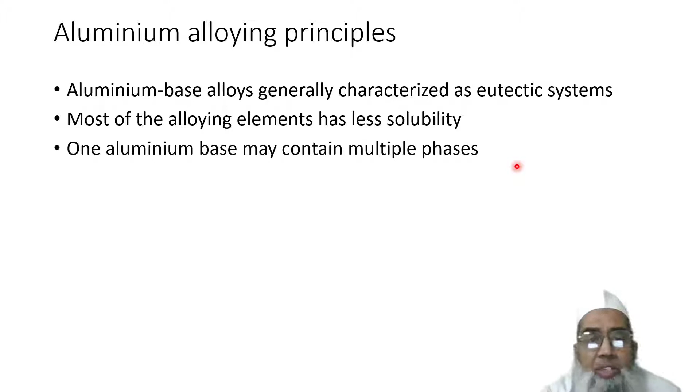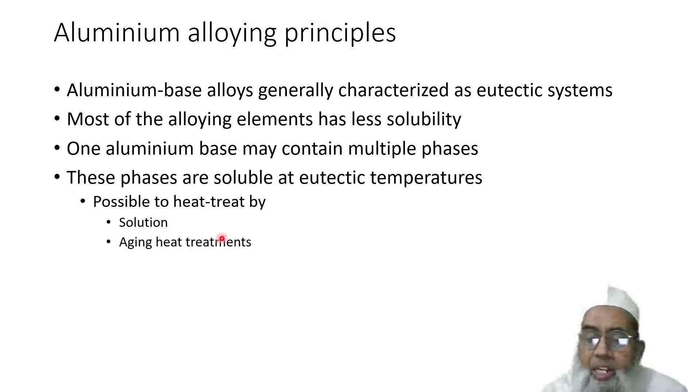One aluminium base can contain multiple phases. These phases are soluble at eutectic temperatures. They can be heat treated by solution heat treatment or through aging heat treatment techniques. The major alloying elements are copper, silicon, magnesium, zinc, chromium, manganese, titanium. However, iron is usually considered an impurity.

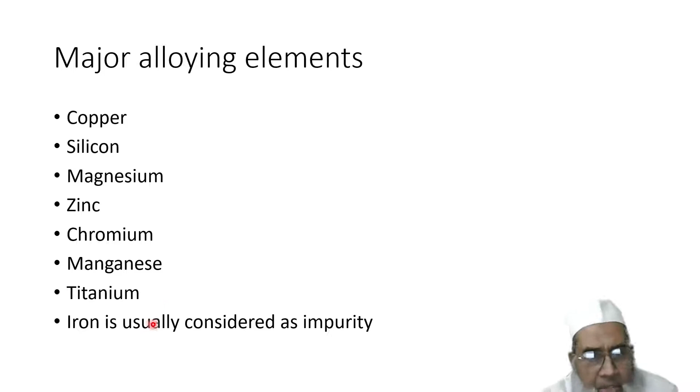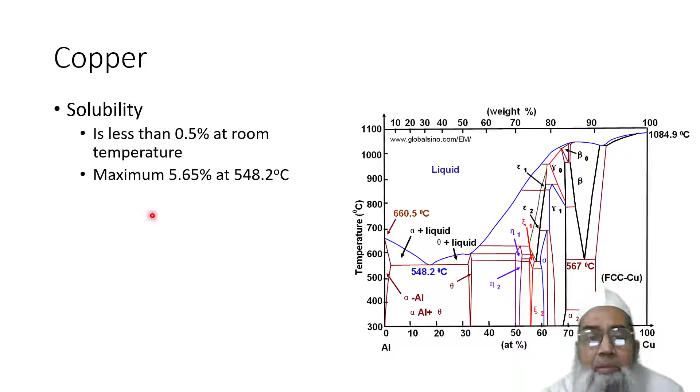First, let us discuss aluminium copper. This is the equilibrium diagram of the aluminium copper system. Here is the eutectic composition, with maximum solubility at 548 degrees centigrade, about 5.65%. It is less than 0.5% at room temperature.

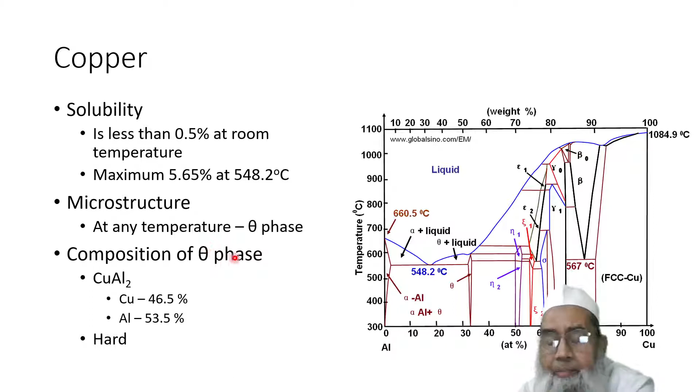The microstructure at any temperature contains theta. The composition of the theta phase is copper aluminide, CuAl2, with 46.5% copper and 53.5% aluminium. It is a hard phase. Therefore, to increase the hardness, we have to increase the theta phase in the alloy system.

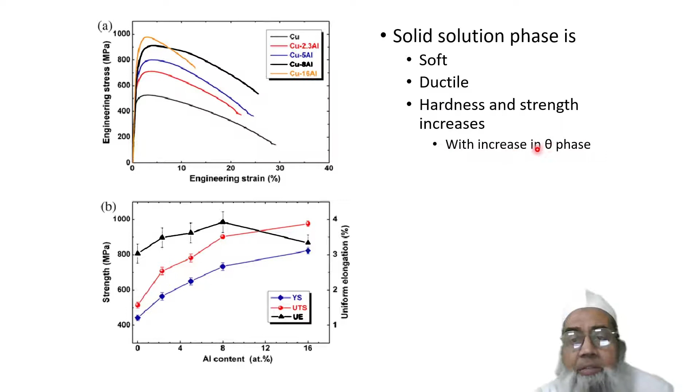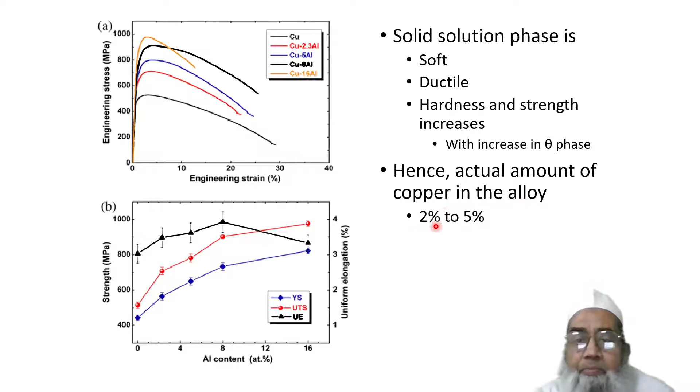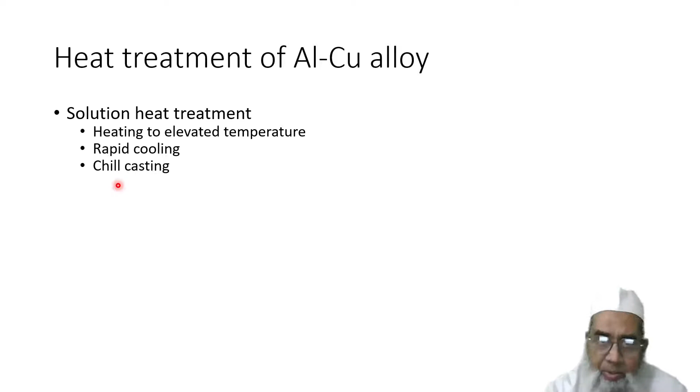For heat treatment of aluminium copper alloy, solution heat treatment is heating to an elevated temperature and rapid cooling, or using chill casting with a permanent mold, and the alloy gets hardened. This hardening can be done by age hardening, that is, increase in hardness with lapse of time.

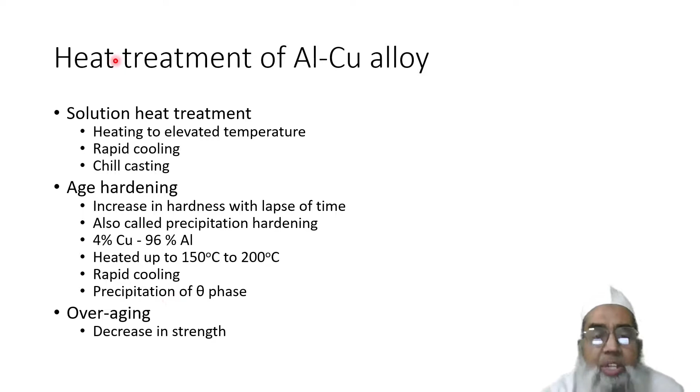When copper is 4% and aluminium 96%, heated to 150 to 200 degrees centigrade, it converts into alpha phase, and then cooling causes precipitation of the hardened phase. But with lapse of time, these phases segregate, which we call over-aging. Segregation of that phase will decrease the strength of the alloy.

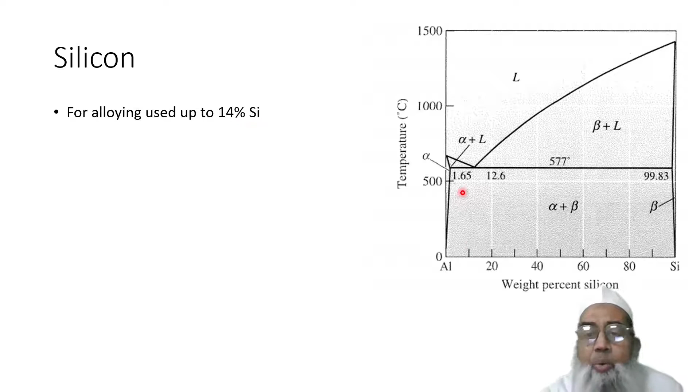Now silicon. This is the alpha phase. Solubility is very small, and we can go up to 14% silicon for alloying. Solubility of silicon in aluminium is 0.05% at room temperature, and it is alpha phase up to 577 degrees centigrade. The beta phase contains an extremely small percentage of aluminium.

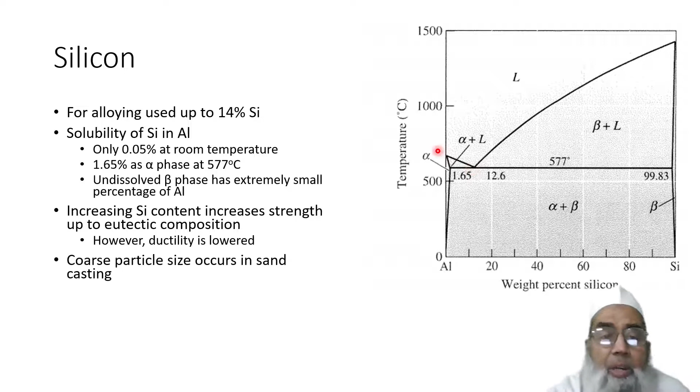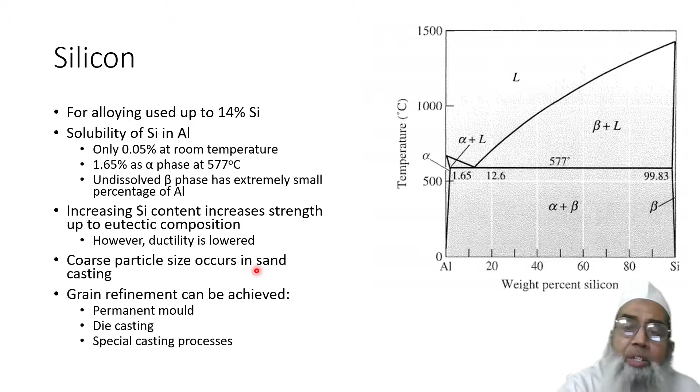Increasing silicon content increases the hardness up to the eutectic composition. However, when hardness is increased, ductility is reduced. Coarser particles occur in sand casting, and grain refinement can be achieved by the chilling effect in permanent mold or die casting. Special casting processes can also be adopted to control grain refinement.

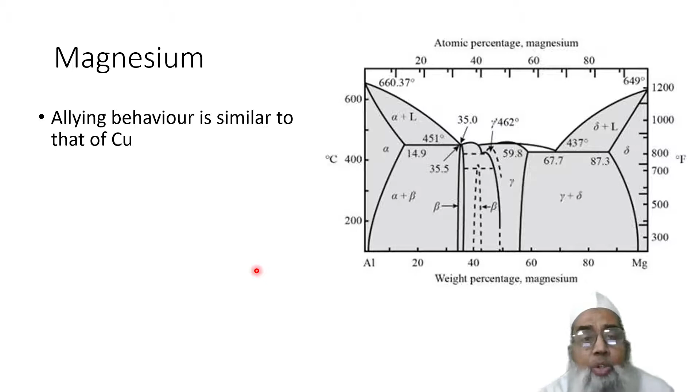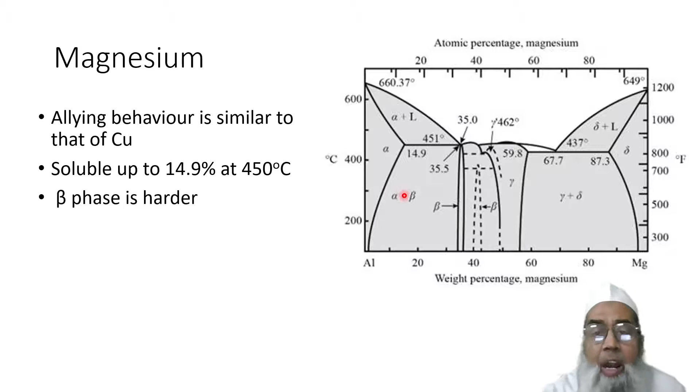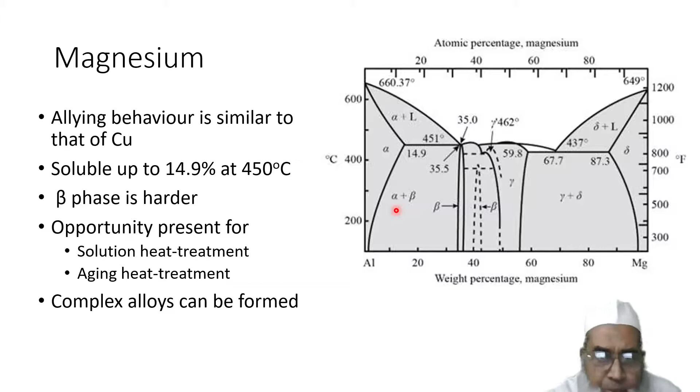Now magnesium. Its alloying behavior is very similar to copper, with a soft alpha phase and a beta phase. It is soluble up to 14.9% at 450 degrees centigrade, but at room temperature this beta phase is harder. By heat treatment similar to copper, we can develop this beta phase, and its amount gives the hardness. Aging or precipitation hardening can be done. Moreover, by adding other alloys, we can form a complex alloy and improve the properties of aluminium.

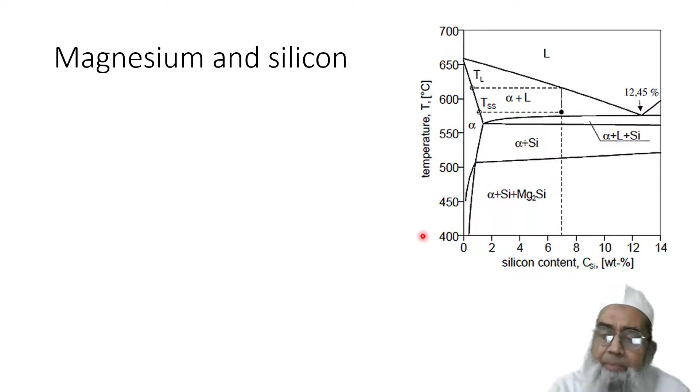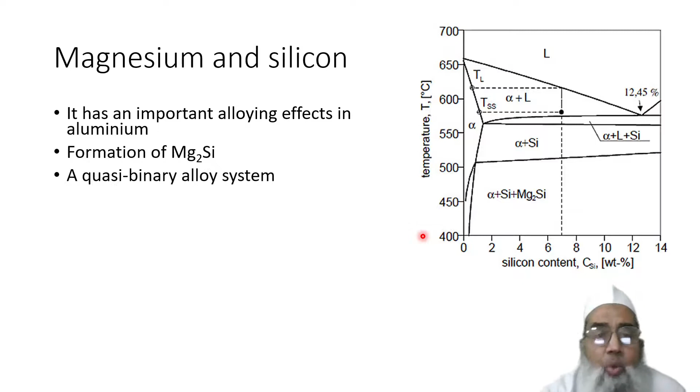Now magnesium and silicon. Both magnesium and silicon have their own effects on aluminium alloy. But in a complex magnesium silicon system in aluminium, we have the soft phase and a very hard phase, enhanced by the complex system. The formation of magnesium silicide, a quasi-binary alloy system, causes a hardening effect and permits solution treatment and age treatment.

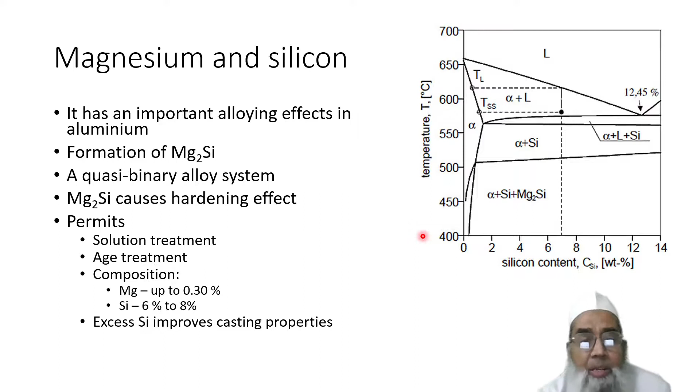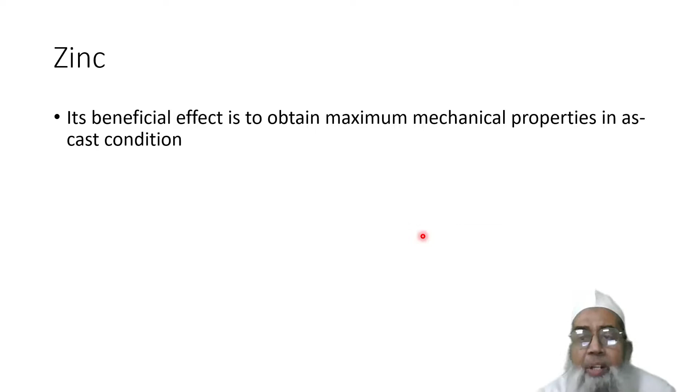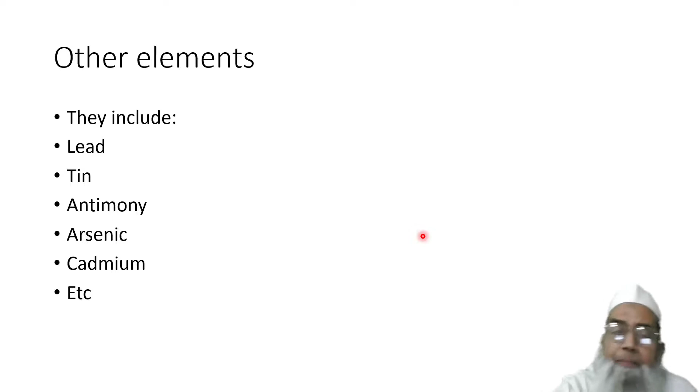The composition is magnesium up to 0.3% and silicon 6 to 8%. Excess silicon also improves casting properties. Next is zinc, which is beneficial to obtain maximum mechanical properties in the as-cast condition. Other alloying elements include lead, tin, antimony, arsenic, cadmium. Lead increases machinability; tin and others have their effects, but they are limited to 0.05 to 0.1%.

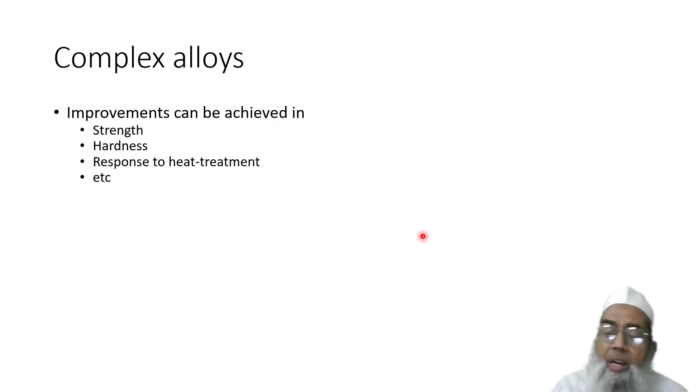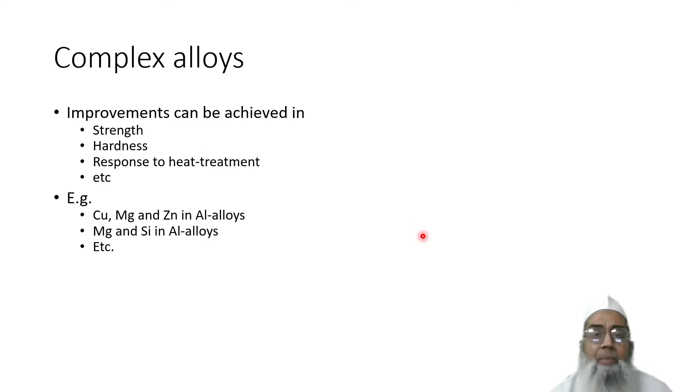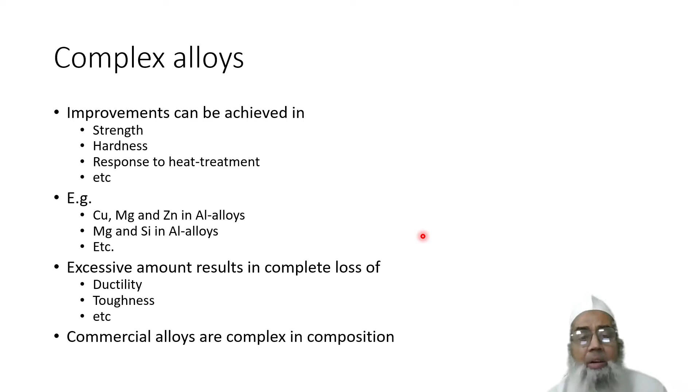Similarly, we can enhance aluminium alloy properties with a complex alloying system to improve strength, hardness, response to heat treatment, etc. We can have copper, magnesium, zinc, and magnesium and silicon in aluminium alloys, tailoring properties to our requirement. However, excess amounts in the complex system lose ductility and toughness, so we must compromise. Commercial alloys have a complex composition.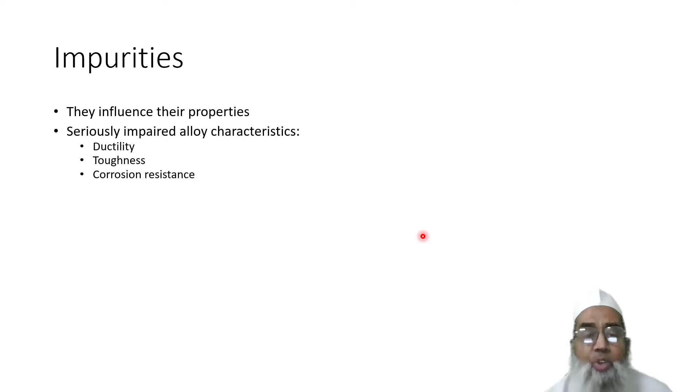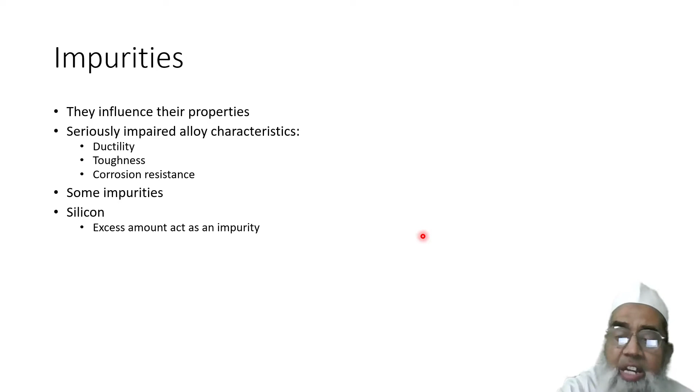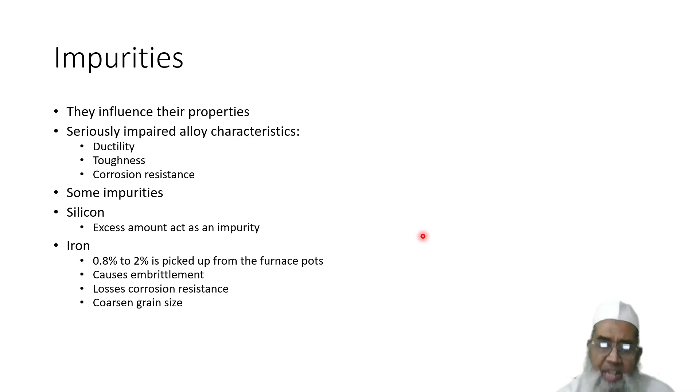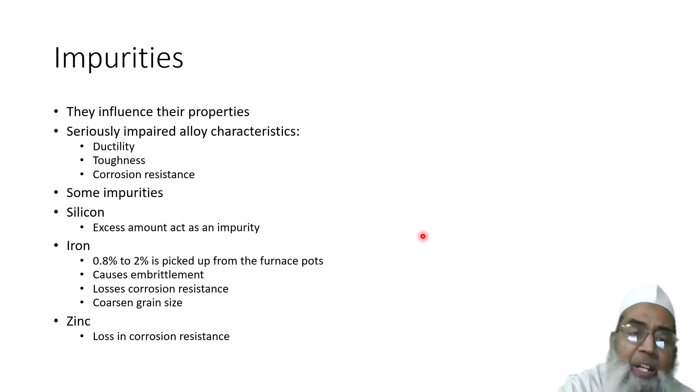Certain impurities seriously impair alloy characteristics like ductility, toughness, corrosion resistance. Excess silicon acts as an impurity. Iron, 0.8 to 2%, can be picked up from a steel furnace pot. Iron causes embrittlement, loses corrosion resistance, and coarsens grain size. Zinc in excess loses corrosion resistance, so we have to control the zinc content.

This is all about the alloying elements and alloying system of aluminium alloys.